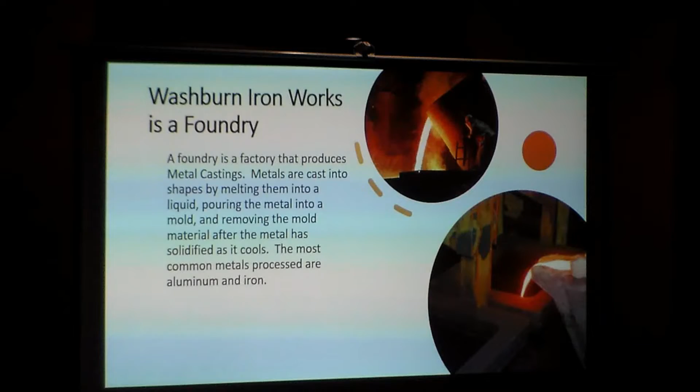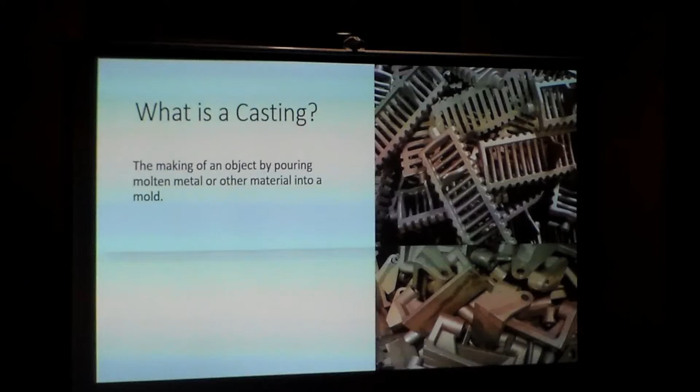So what is a casting? The making of an object by pouring molten metal or other material into a mold. Our molds are made from sand, and our sand is black after we add additives to it. Essentially, we take a pattern that has an impression that will make a void within the sand mold, and we pour molten iron into that. It solidifies and it shakes out. There will be a short video here in a little bit that you'll get the concept of it.

The process of casting dates all the way back to 4000 BC. So it's a very long-driven process, a very long time. It's also very critical to basically almost every aspect of what it is that we know our day to be on a day-to-day basis globally.

Foundries dating back from 4000 BC essentially are the original recyclers. We take scrap material, a product that's been discarded, receive the scrap material, blend it into a recipe, melt it down, and produce another usable part.

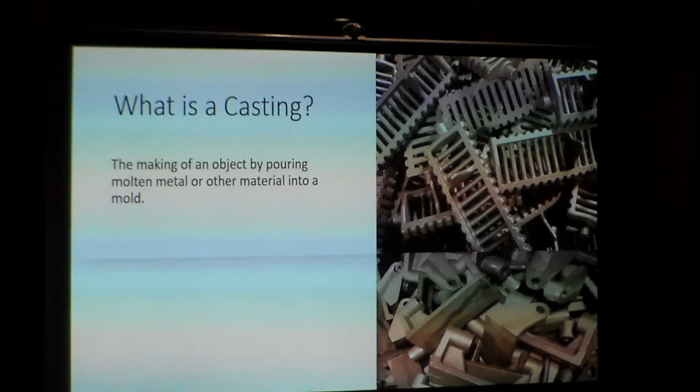Oh, skipping up here. I should have hit the button a couple of times. You guys would have seen that.

Why is a foundry important? Do you use castings? Essentially, if you drove a car, rode in a car, walked down here, or rode a bike to get down to this facility, you used a casting. It's generally known that more often than not, within 10 to 15 feet of where you are right now, there's a casting around somewhere. So it's used in every aspect of our life, and it's very, very important for the way the world is today.

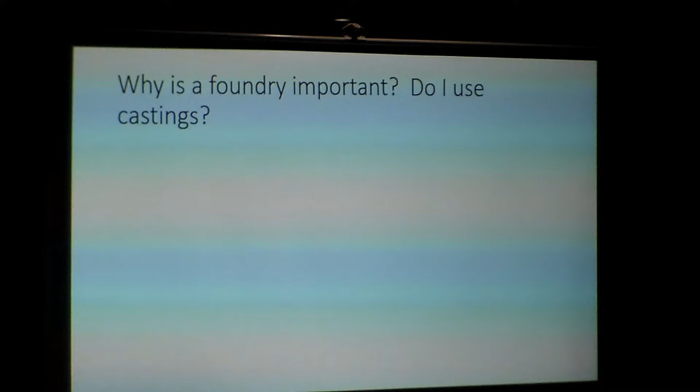Hopefully I'll get the gist of this slide before the end of it. Okay, so here comes a video of the general process in our facility, getting back to giving all you guys a better understanding of what it is that we do, and then we'll get into the history of it. I might pause it a few times to elaborate a little bit.

So this is going to be a video of us making the pan. If you guys can see that video, we're mulling and mixing sand here, and you can see there's going to be a little dribble of white sand. Let's see if I can pause that right there. That's silica sand that we bring in from Badger Mining.

Every batch of sand, this black sand down in here, if you can see it—I know it's kind of dark—we reuse. So not only are we recycling waste metal, we're also reusing our sand. But because of the thermal shock that the sand gets from pouring molten iron onto it, we have to add about 0.6 to 0.8% new sand per batch. A batch of sand is 2,500 pounds.

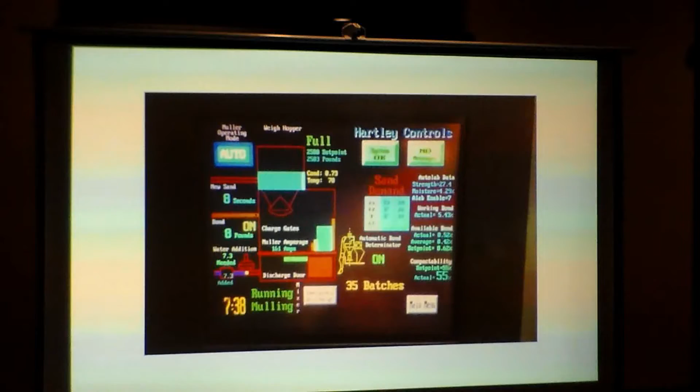This is a muller in our facility that's mulling the sand, getting it ready for production. It does quite a few tests before we even get it to the molding machines, before we even use it. Here's the sand controls. The sand control system will check compactability, moisture content, shear strength, and temperature of the sand. If it doesn't meet our set criteria, our automation sand control system will kick that load of sand out, and it won't even make it to the molding machine.

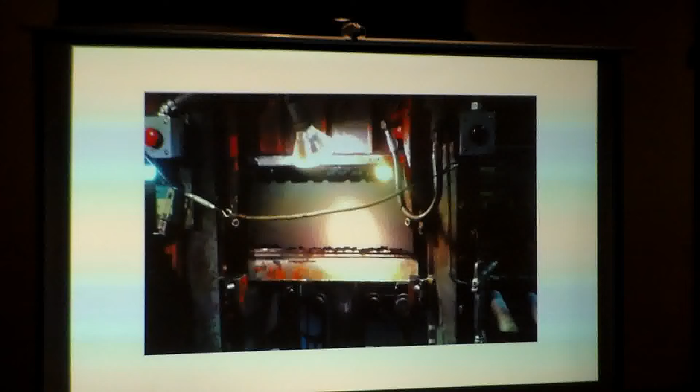This picture here that I paused is an automatic sand molding machine. This bottom half is called the drag, and the upper half here, which is in the flask, is called the cope. There's always going to be two sides to a sand mold, and there's a pattern. It's hard to see, but there is a pattern in here that creates the cavity of the casting that we're producing.

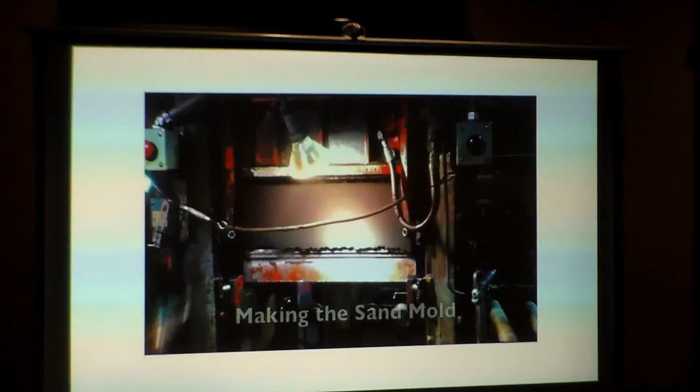We'll let it go through here for a little bit. So the mold is now done and completed. Right there is actually the pattern, because that mold was coming over. That mold will be kicked out onto a handling line where we will then put molten iron into it.

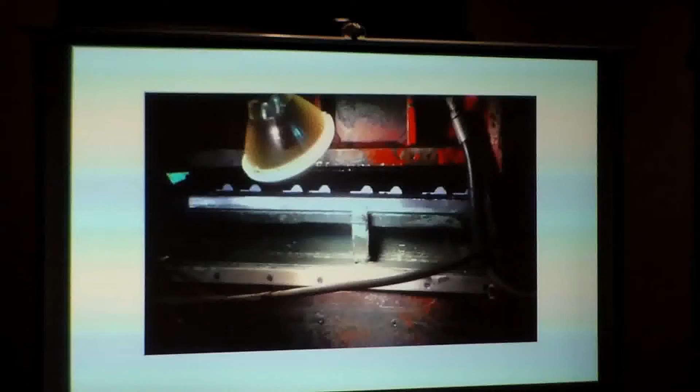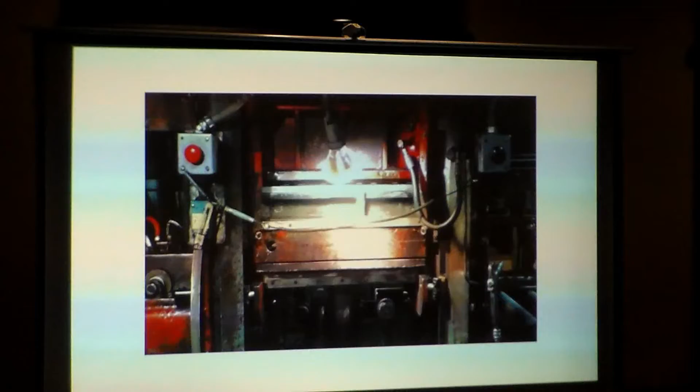Here's a replay of how that machine makes a mold. It's dropping sand in there, it's doing a vibrate and a compression, drops down, the cope was made up in here, the drag is being dropped, and the pattern will get retracted into the machine. You can kind of see that's our little griddle top there on the bottom.

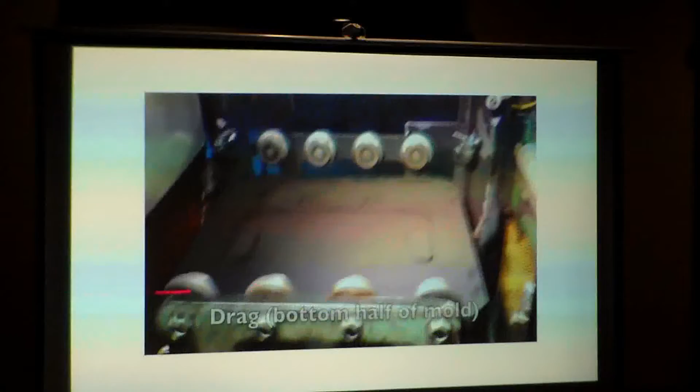Molds come on out on a handling line where they will get staged onto our pouring deck.

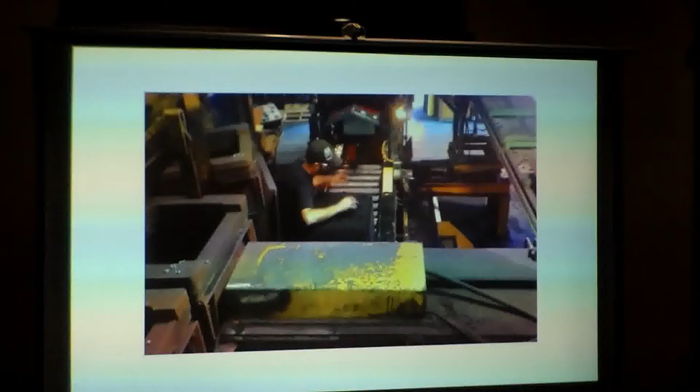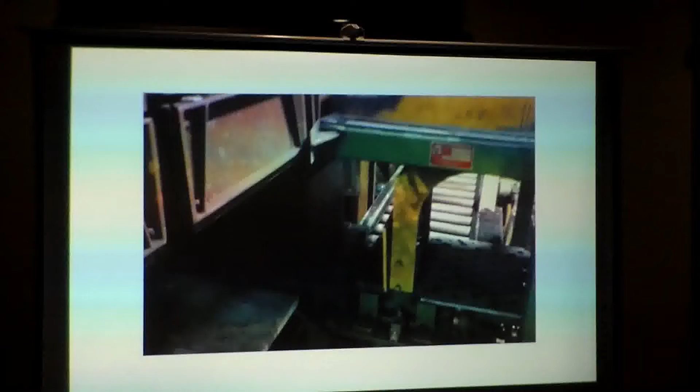This video is a little long here, I would say. So all this is automated right now. This video, I believe, is from probably 2014. Judging by that molding machine that's there, we've upgraded that one since this video.

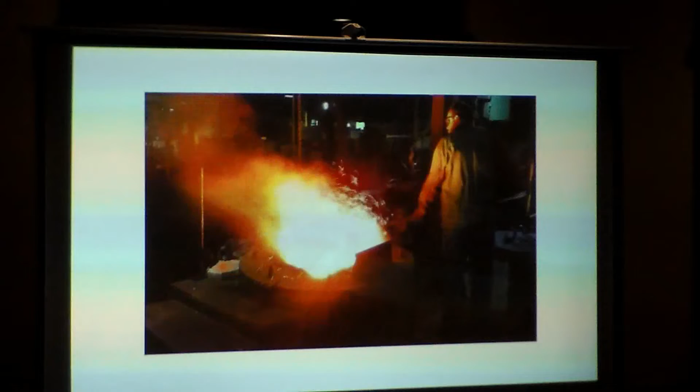So here is our electric furnaces. We use a lot of electricity in our facility. These are medium frequency furnaces. They hold 3,000 pounds of iron per batch, and we bring the base iron up to 2,750 to 2,800 degrees.

So what we're dealing with is hot stuff. And feel free, if anyone has any questions at that particular moment, just raise your hand. I'll see if I can answer it. If not, no big deal.

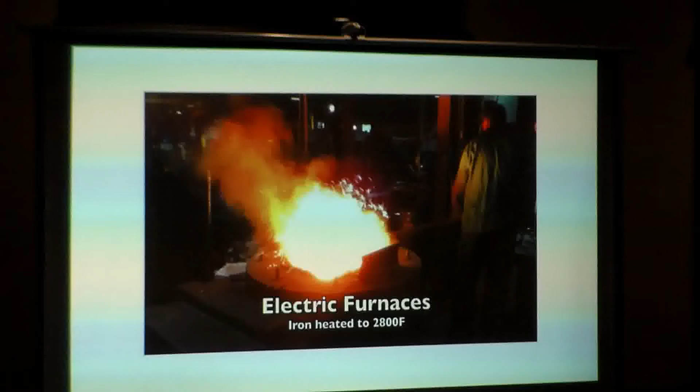So does it get molten? What temperature does it get molten at? Iron gets molten at right around 2,300 degrees. We have to bring it higher than that, so we can have time to handle it, and also because we add a lot of carbon and alloys — copper, silicon — and carbon needs a long time to get into solution to make the specific iron we're making.

It's a good question, I'll touch base on that. We don't just make iron. I mean, yes, it's iron, but within that realm there are multiple classifications — there's gray iron, and then there's ductile iron. Within ductile iron, there are many different classifications, and based on that we are changing the recipe of our base iron on that particular charge. So it's very dynamic, a lot like being a chemist. There are a lot of additives that have to go into it. Temperature plays a role, the carbon, the alloys, the silicon, the manganese. We even put rare earths like moly in there.

It's a lot different than the aluminum industry. The aluminum industry buys ingots, and they basically heat them up and pour them — that's a much simpler foundry to operate. In the iron industry, it's a totally different game. Basically, we're chemists. Go ahead.

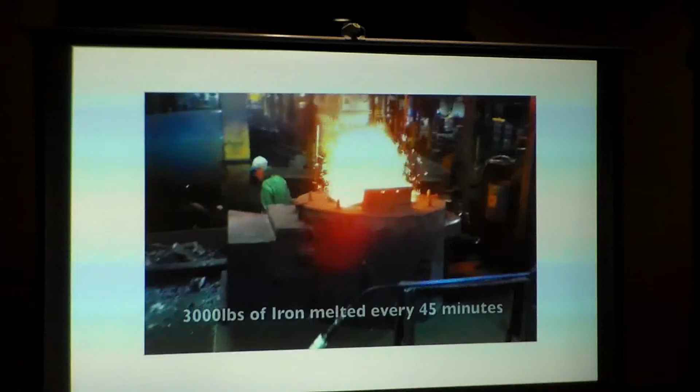So you see this one's pretty much up to temp. They're pouring it right now, so they're lifting up our furnace and they're going to pour it into what we call a teapot ladle. A teapot ladle is how we transfer our iron from our furnace deck throughout our facility into different pouring locations.

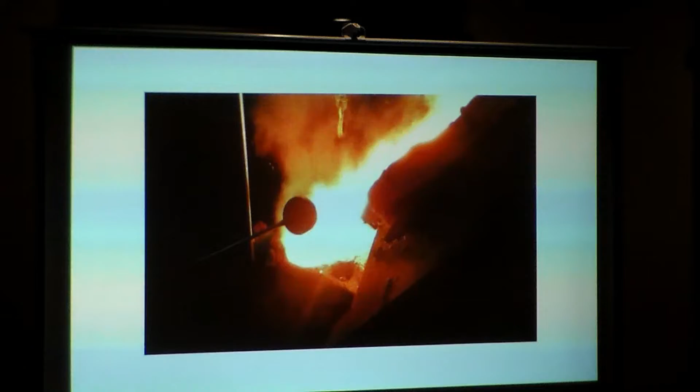600-pound ladle — he's adding some inoculant and carbon. That'll go on an iron buggy here, and that's fully automated as well. The furnace operator will pick and choose which molding machine gets it, and it'll automatically stop in there.

Is that an insulating blanket on top? Yes, yep — keeps the iron as warm as possible, and also kind of protects the iron pour as he's pouring it. You'll see that up here where they transfer it up.

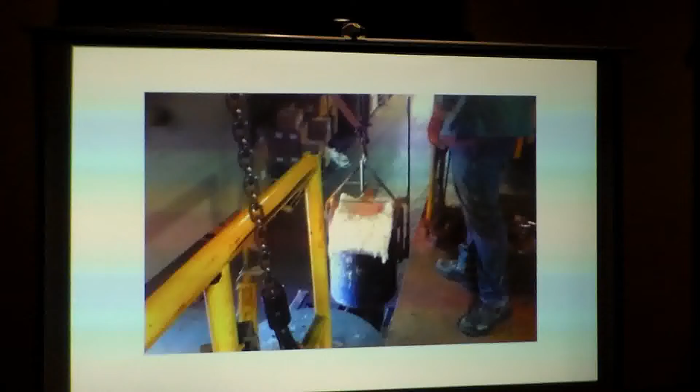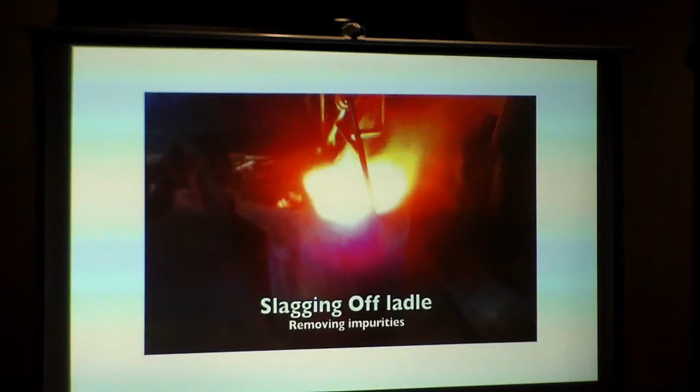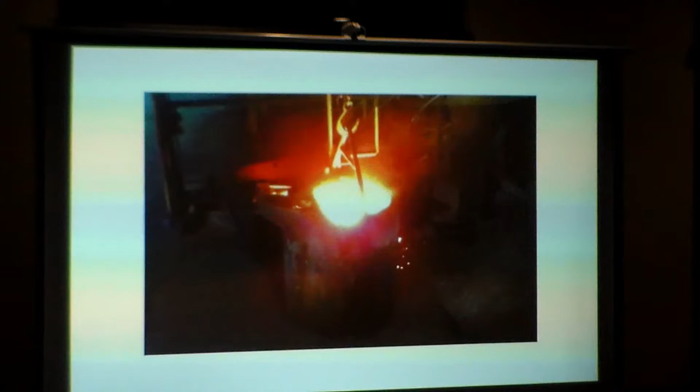So he's taking the lid off here, and he's taking a coagulant which collects all the impurities on top of the iron. It's called slagging it off, and he'll remove it with angle iron before we want to pour. If we pour any molds with that in there, you're going to have a lot of porosity and voids in the casting that will make it an unusable part.

What's the sound like there? You would hear lots of things - buzzers, and when that iron buggy runs around it's very loud. It has a beacon on there so people are aware that it's coming. Here, when he's slagging off, you'd hear a lot of crackling with coagulant that's clumping all the slag and impurities together, plus a lot of hydraulic motors and pumps going. Then up by our shakeout, you'd hear a lot of tumbling of castings.

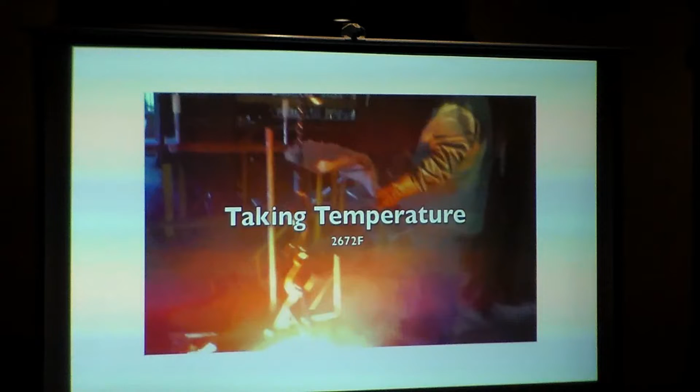So in some areas it can be very loud. Most areas it's not terribly loud, but I'd say it's a typical industrial manufacturing facility.

How warm is it for that guy standing there? It's decently warm. That's part of why we have that Cerawool, that white material we put on top. You can see he took the temperature of this ladle and it's 2,672 degrees. Our teapot ladles also have a shell in there that helps keep the temperature in so it doesn't cool off too quickly, and it also protects the iron pours. It is a little bit hot, but the guys get used to it, and in the summertime we hand out a lot of liquids and cycle people through there.

Can he see the slag on there? Yeah, you can see it with your naked eye. If you don't use that coagulant to get it clumped together, as soon as you take that lid off you'd see some impurities floating on top. The coagulant just clumps it together so it's easy to scoop it out.

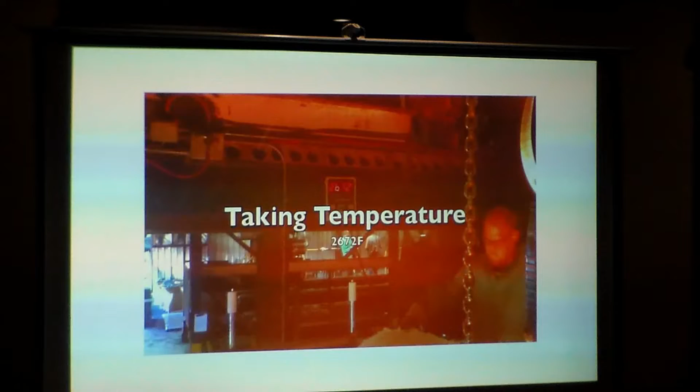What is the stuff on top of these things? It's like impurities from the remelt material. It could be some sand left over in a gating system. Also, we bring in a lot of scrap material, so it could be rust, dirt from how that scrap was stored, or whatever - any kind of impurities, essentially.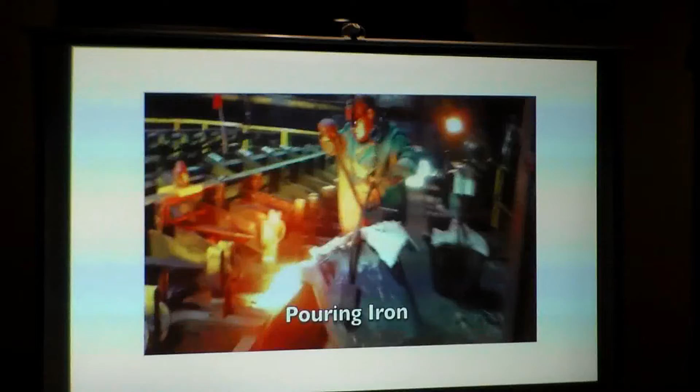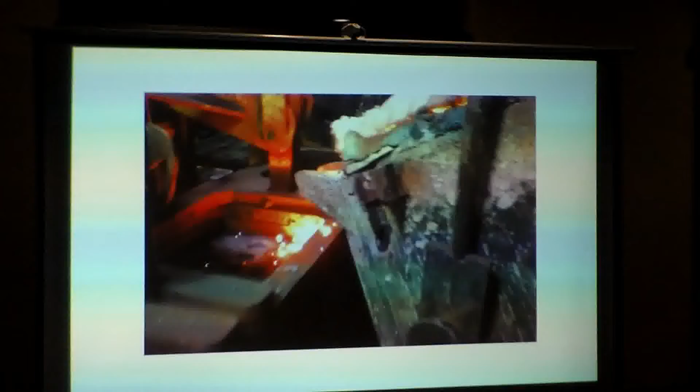And then here, after they take the temperature, they're pouring out of the ladle into the mold. We always pour from the top, going through a gating system. This fills the cavity made in that mold from the pattern's shape. It solidifies over time, then the mold gets kicked out, and you'll have a casting - you'll see it come out here off the mold handling line. Everything's fully automated besides the pouring at this point.

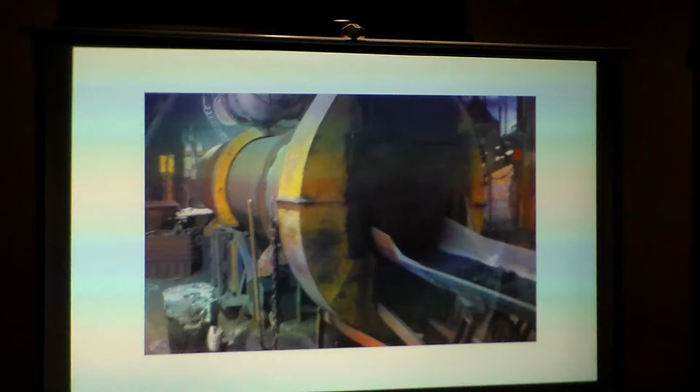So there's a little griddle coming down our shaker conveyor system, and this goes into our shakeout system where we separate and reclaim all of our sand for future processing or use. It's going into a drum there - it's called a Didion, a rotary drum that tumbles and screens out the sand before it goes back into our system. You can kind of see it there.

Castings get tumbled. In this presentation ahead of us here, we've done a lot of internal upgrades - so knocking off the gating.

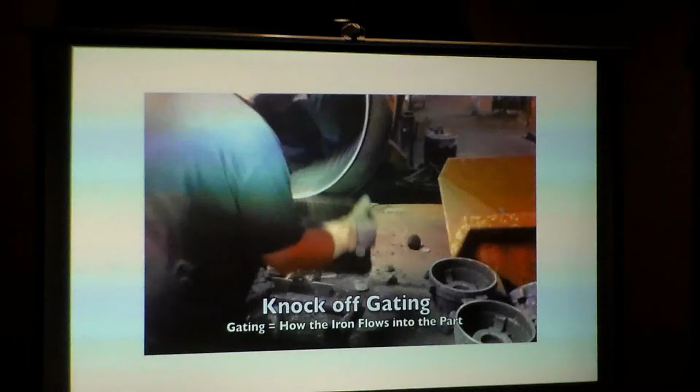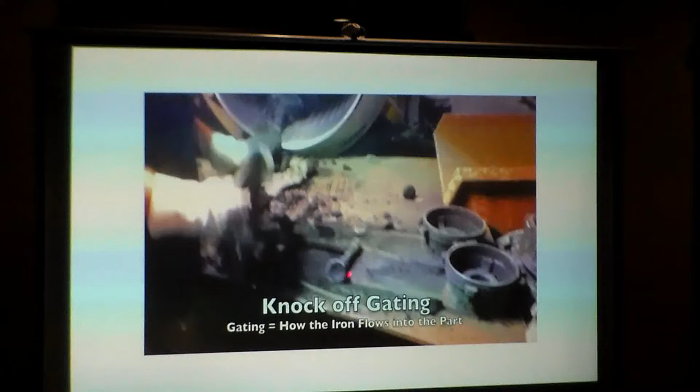I don't know if you can see it, it's not as blurry on my screen. Here's the down sprue - this is how we poured. Right here is a pouring dish. We poured from that ladle into the top of the mold, it goes down a down sprue, down to a runner here into two contacts. Contacts is the cavity from the gating system to the part - it's how we get iron to the cavity within the mold. Then it fills the actual cavity up from the bottom up. Yep, with gravity, it's going to flow through, drop down, and come up.

You have venting and stuff too. Could you repeat the question, because we can't hear it back here? Good call, I will try and do that. She wants me to repeat the question. I don't know if I can remember all of them yet. From this point on, I'll try and repeat the question.

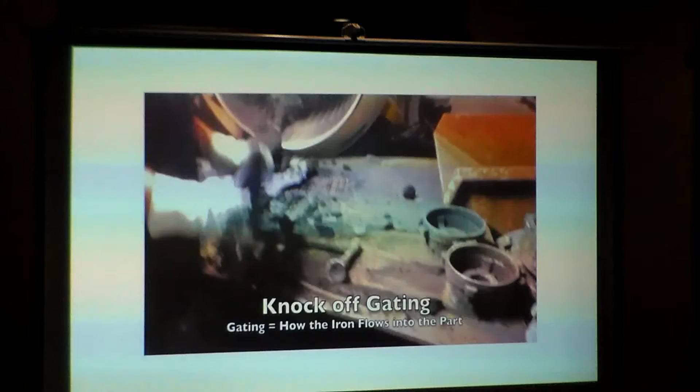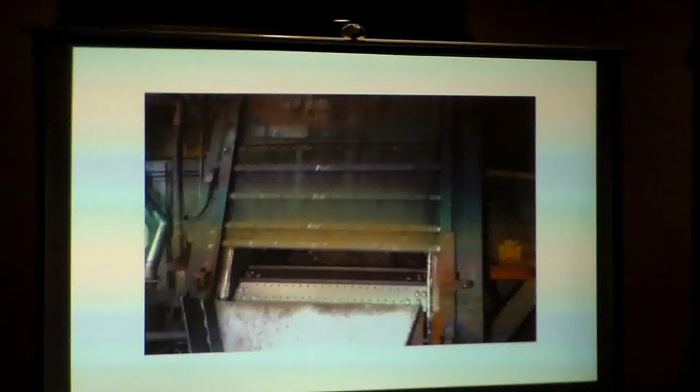So now they're being handled, and they're organized, because we make a wide variety of castings on any given day. They'll go through a tumble blast system here, where the sand gets blasted off and the castings get cleaned prior to finishing - it's a steel shot blast, tumble blast. I believe it's about an 8-minute cycle, and it can blast around 2,000 pounds at a time.

This area is kind of loud.

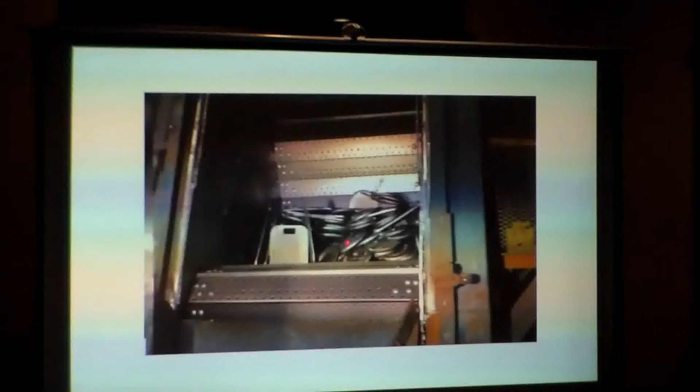So you can see the castings are nice and shiny. They'll reverse the apron here, and those will get dumped out onto a hopper, and then we'll go to its next stage. Do they ever break in there? Sometimes.

We do have a different blast in-house too for more fragile castings. We try to blend maybe one or two different jobs, take a ductile small part potentially and mix it in with a bigger, heavier thing or a more fragile thing, so it creates more of a cushion, so to speak, for the castings tumbling.

So this is a top view of one of our finishers. He's grabbing the castings, grinding them on a snagging wheel, prepping them to be shipped out to the customer, which I believe these were made for one of the homecomings - what date would that be?

What are the casts? That looks like a skillet to me. Yep, that's a little skillet that we have that we make in-house. We made it for a homecoming, and I believe it was 2015.

Do you typically make the same product or all sorts of different orders? All sorts of different things, yep, and you'll see that in a couple slides here. We make - I believe we're at about 2,700 different patterns. So that's 2,700 different parts.

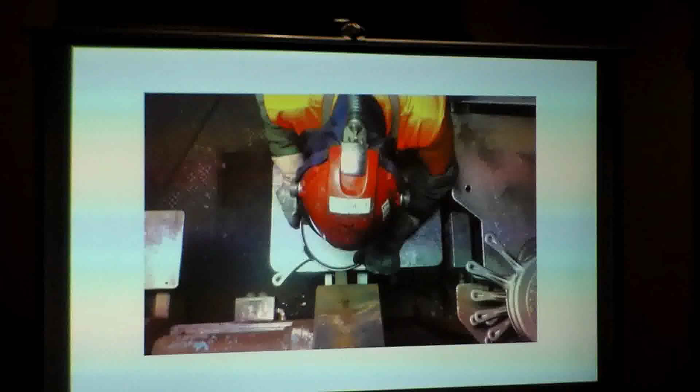A lot of that is agricultural stuff - the big John Deere, Caterpillar, there's mining. We do sprinkler components, we do heavy truck, so McNeilus cement trucks, fire trucks. Really, we'll do most of anything that fits our facility with the exception of automotive. We're not large enough to handle the volumes that the auto industry demands.

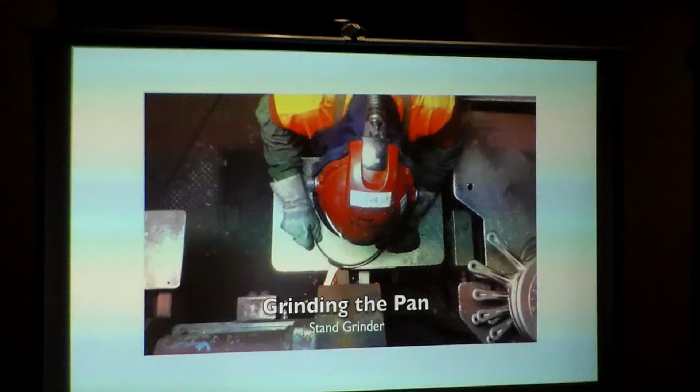I think we're getting to the end here, and then we'll get into the history stuff. I think that's why you guys are all here, right?

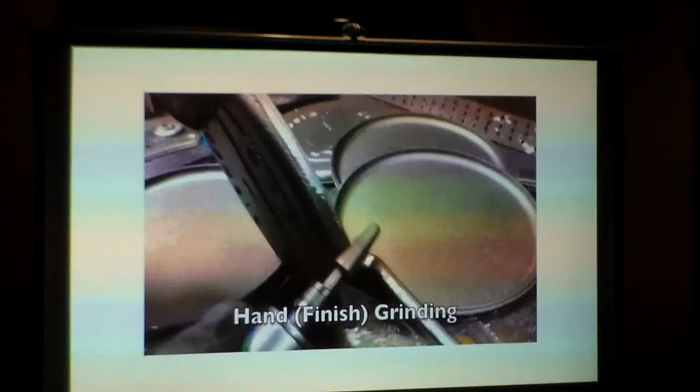Some close-up of some hand finishing of the skillets.

I guess that's it. All right, it's over, guys. Good night.

There is - I'm sure a lot of you guys know him, he was pretty active in the community. That's Otto Rusch. He's the founder of the Iron Works as we know it right now.

I don't want to just jump too far ahead because there's a lot of - oh, this thing's automatically going now. I gotta learn how to use this remote. You guys got pretty techy here.

So Otto came up - well, here, I'm gonna go with this first. I don't wanna jump ahead. Again, remember, I'm presenting a presentation that was mostly done by someone else.

We call it the two-story building, okay? That is right here, and I think most of you guys know it because it has that mural on the front and around the corner. It's a very old brownstone building. We call it two-story because it's two stories. It's basically our sand mulling operation currently.

The two-story brownstone building was built about 1900 and was once a W.H. Lemke dry goods store - that's what we were able to dig up. In 1940, George Malinowski started Washburn Foundry with the purchase of the brownstone building. The same year the primary gray building was built, right here.

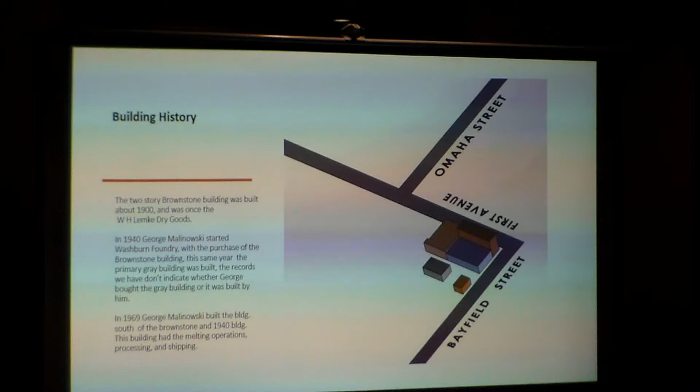The other buildings on there, I know it's just three-dimensional, we don't have the dates on there, which would be this one and that one. So that's basically how it was when George took it over. Let's see if I can get this to work. Voila. So that's how the foundry was before Otto came into the picture.

So Otto Rusch, which is my grandfather, came up to Washburn in 1975. He purchased the facility in February 1976. See here - when he purchased it, it was basically non-operational. There was only one light, the floor was dirt, and the furnaces were frozen up.

What that means is they basically had a molten bath in the furnace that was there and they walked away from it, so it solidified in there. So it's not good for an induction furnace. It was in rough shape.

I'm going to touch a little bit on the backstory of the history of Otto. He's basically been, as far as I know, a lifelong foundryman. He originally started working in a foundry called Brillion Iron Works down in Brillion, Wisconsin. I couldn't tell you exactly how many years he spent there, but 1948 to 1955 - there we go, there's one of his sons right there. 48 to 55, thanks Randy.

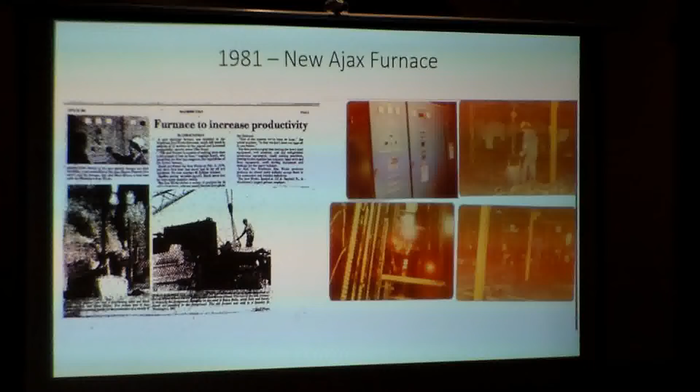Sorry guys, he's got a lot of notes here that I have to scroll down and see.

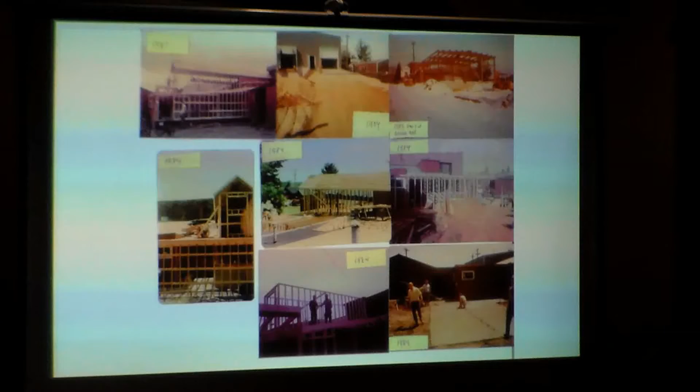Here's an article from July 22nd, 1986. The caption on the photo reads, 'A good example of Washburn's ability to change with the times.' It highlights W.H. Lemke Dry Goods, then Washburn Foundry from 1940 to 1973 under Malinowski, transitioning ownership to a company from Medford from 1973 to 75, and then Otto purchased it from them in 1976.

The new building would be used for what we call disc molding space. The discs are used in the agricultural industry. It's a 24-inch diameter, very thin, with a lot of pockets in it, and it rotates vertically. Essentially, seeds come from out in the fields into a receiving facility, and they'll have different types of discs in there that separate weed seeds, corn, and grass seeds. That's that disc process.

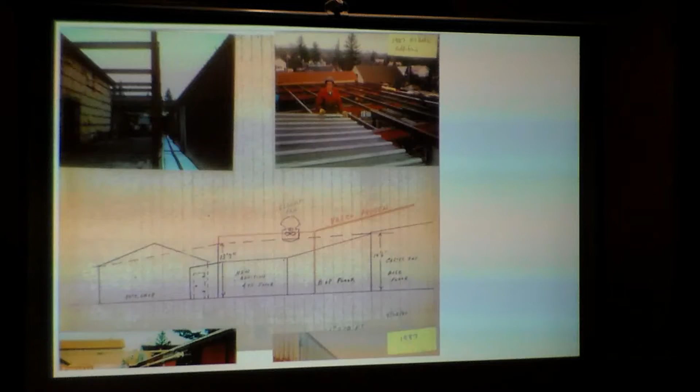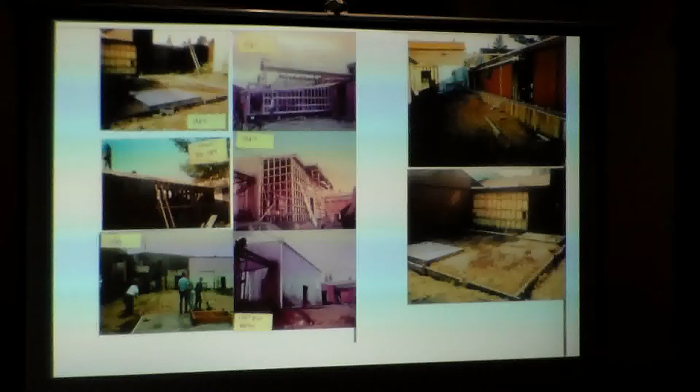Here's some additional photos of the 1987 construction. An article from 1987 highlighted that the Foundry now had 1,300 patterns at this point. Rusch stated that the market over the last year had gotten very competitive, with customers asking for casting quotes from 3 to 4 foundries before placing work.

He goes on to talk about how the sand used for the mold is crucial to the success of the casting. I'm quoting him here: 'I think of it as a cake recipe. You need certain ingredients to produce the desired results. Every casting we make requires a variation on the same basic recipe.'

This article also talks about replacing the AJAC furnaces. So now he's on his 3rd furnace replacement from 1976 to 1987, replacing the AJAC furnace with a 600 kilowatt Inductotherm furnace with a capacity of 3,500 pounds.

1987 also brought on another significant change, which was the addition of making ductile iron. As I mentioned earlier in this presentation, we make gray iron and ductile iron. Think of ductile iron as more malleable—you can stretch it a little bit, twist it a little bit before it will break.

Traditional gray iron, if those skillets were made of gray iron and you dropped one on a rock from this high, you would see it shatter. Ductile iron would not do that. There are pros and cons to each. Engineers will choose whether they want a gray iron or ductile iron mix based on the casting application. Generally speaking, gray iron is really good for heat dissipation, vibration, and noise, while ductile iron is more suited to strength-driven applications.

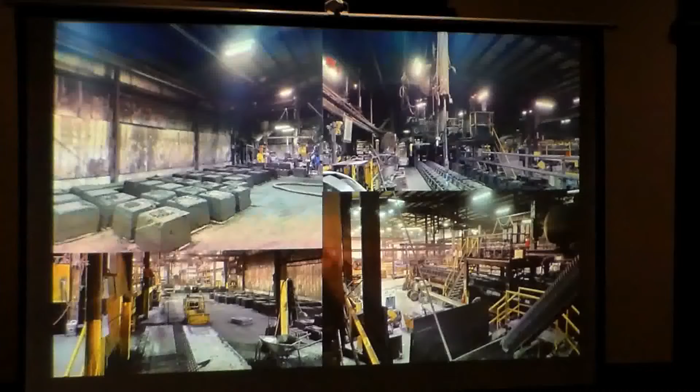So here's a few interior photos. These are more recent interior photos because we didn't have any exterior of Plant 2 from '89. Here's some molds here, referencing how big. This is a 30 by 30 mold; heavier parts would run on that. Up here is the handling line where the Roto Matic was. That's a 1620 - when I say 1620, we're talking inches, the footprint of the sand mold. So 16 inches by 20 inches is the mold envelope there.

1991, Otto Rusch was named Small Business Person of the Year for Region 5. Then in 1992, he was named the State of Wisconsin Small Business Person of the Year. He was honored in Milwaukee at a presentation and banquet. So he was well known in the state of Wisconsin, the foundry industry, basically across the whole Midwest.

As I'm sure a lot of you guys know too, we're fortunate enough to grow up with him in the community. He was very involved, for sure.

1992, we have a small addition, a 16 by 36 building, and that's basically our sand refuse. Some of our sand, as we use it in the process, goes through thermal shock, and we have to take some out so we can allow for the capacity of bringing in new sand as we mold it. So that's where that sand gets housed.

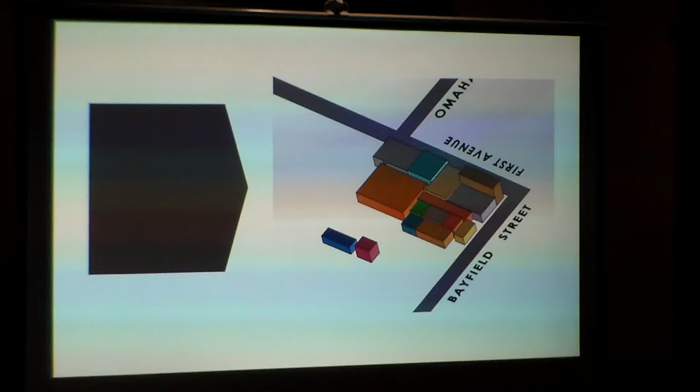In 2000, we added what I call the Menards building right here. That building is basically just for storing components for maintenance or objects that don't get utilized very often but can't be subject to the elements outside. That's that one there.

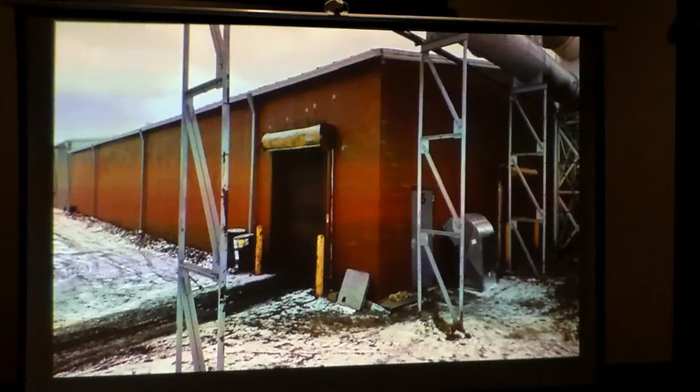We can hold 110 molds on that handling line. The castings are poured, they go through one revolution, and index into the inside of the line right here.

They go through another revolution of cooling, and then that's when they get kicked out onto the shakeout system.

So in 2007, the grain separation disc, as I described before, made it into the Engineering Solutions National Magazine.

Later in 2018, we submitted that into the AFS Casting of the Year competition, and we did win Best in Class for that casting process, which is a pretty big deal in the foundry industry.

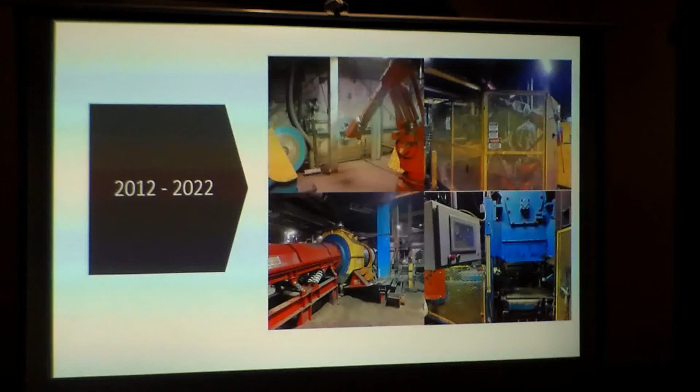So this was 2019, new shakeout system, larger shakeout system. We used to chop saw all of our gating off of our castings, and we went to what's called a hydro wedge - we use a hydraulic bill that snaps it off, so it's much safer for the employees and way easier. Here's a BMP upgrade. So this replaced the Roto Matic. This was in 2019. It's also 1620.

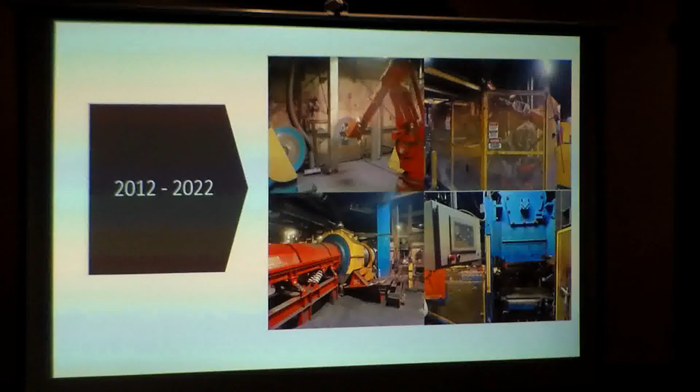And then here is the Auto-Matic. We had to - this machine was brought in 2016. I know it bumps around from that BMP to this one. This is the latest, greatest Hunter molding line. It's got the latest technology. It's a 2024. It's heavily automated, has tons of sensors, tons of adjustability to it, and it will still pump out about a mold every 20 seconds if we really want to push it hard.

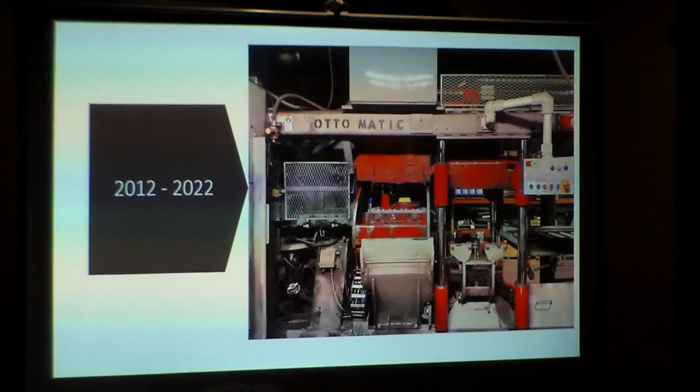Here's the best in class article back in 2018. Washburn Iron Works.

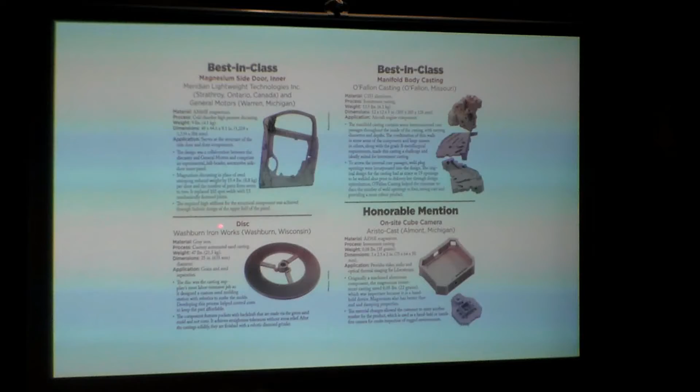So with all the work that we put in, that was tailored in my era, 2012 to 2022. We were able to increase production over that period by 60% with the existing equipment and some automation. That's huge in the foundry world. Compared to 1992 to 2017-2018 numbers, it was a 100% increase in production. There was an article written up about these improvements.

Here's another edition. Yeah, this one is the latest one.

In 2022, we added a really nice new building in the back of our facility. It's 13,000 square feet, and it's basically the stepping stone for where we're taking this company in the future. We're going to upgrade our furnaces, which I believe will be the 5th time now.

Currently we run 3,300 pound furnaces. We're upgrading them this year, we have new ones coming in that are going to pump out 6,600 pounds of iron, much faster too. We can do 3,300 pounds in about 45 to 48 minutes on average. For context, any given day in our facility, one shift will pour between 36 and 39,000 pounds.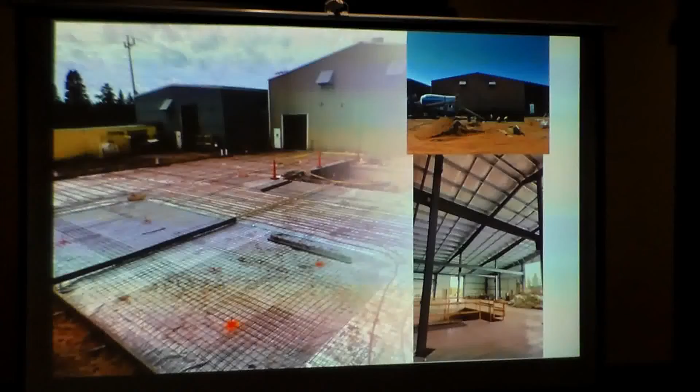Part of the new building addition is to recapture the waste heat off of our future furnaces. Our induction furnaces have to be cooled continuously as they're being used. Even as they're shut down, they have to be cooled for about 8 to 12 hours, otherwise the copper coil will melt down. So there's a lot of waste heat involved, and we had a desire to capture that. As far as we know, we're the only foundry in the Midwest recapturing waste heat from furnace cooling and putting it into in-floor heat. There's another picture on the side there.

So this brings us to this big guy here. We worked very hard over the past year to get a grant called an EIGP, an Energy Innovation Grant Program. That's why we put that building in place, so we can utilize the energy innovation we're putting together here this year. We received a $1 million grant for the process we're implementing, which is the automation of scrap receiving.

So you saw those 3 doors that came in, we bring in 3 different scrap materials. We're designing and developing our very own fully automated magnetic crane. No other foundry we know of has it fully automated to the extent we're going to do it. That's where our energy innovation and efficiencies come from. Essentially, the furnace operator will go to a screen and say, I want a charge of X material. The crane will go pick up different ratios and recipes of material we have in our facility, tare it, figure it out, trickle some down, and weigh up that charge for the furnace operator.